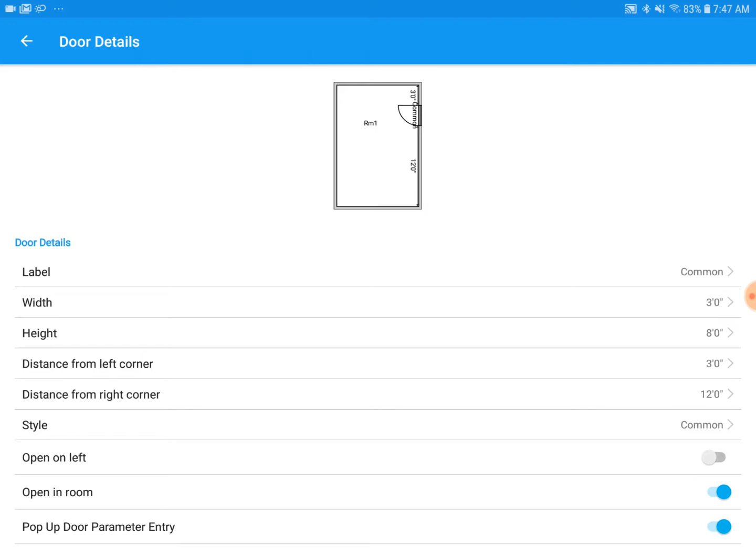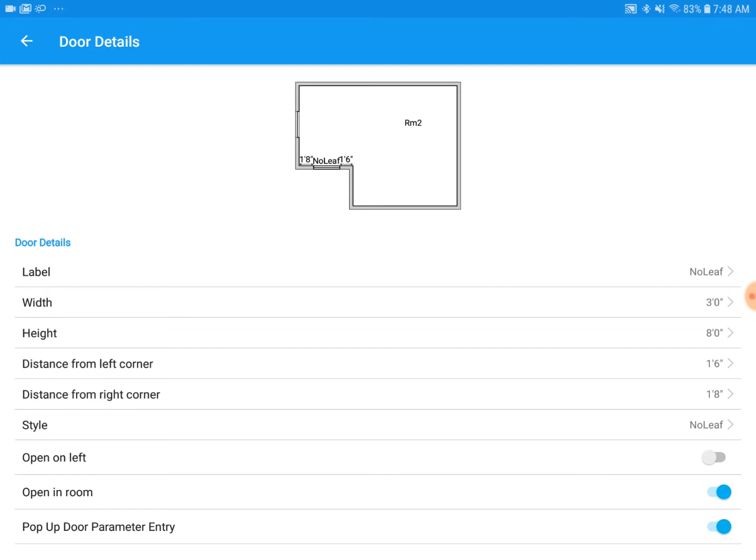I'm going to grab a no-leaf door so we can see the difference, and drag this into a different location. Same idea, I can edit these details if I choose to. The types of doors we use are for aesthetic purposes only; the type will not make a difference with our estimation.

If I move over to the room section, we have some templates saved here that are automatically in your database, but you can also save your own to these locations. Same idea, drag and drop onto the screen, and as I let go, it'll be put in place.

If I go to cutout, these are great if you need to remove area from the net of a room, such as for a cabinet, a tub, or a sink. Again, we have some pre-populated, but you can always save your own. I can just drag and drop one of these into the room, and we'll even have markers to snap it into corners. Same idea with that pop-up, we can always turn this off or edit some of the details.

We go into stairs, rinse and repeat. Grab a stair, drag it over, and once I let go, we'll have some details we can edit for the stairs, such as riser and tread, number of steps, the width of the stairs themselves, and even the covering style.

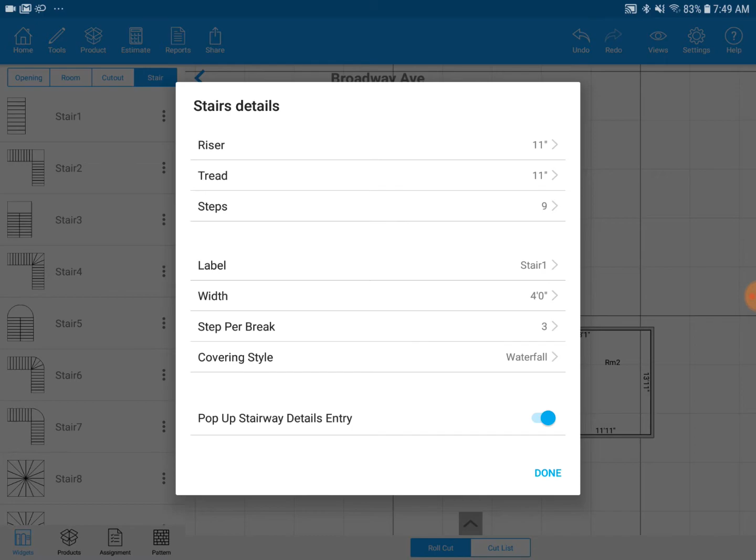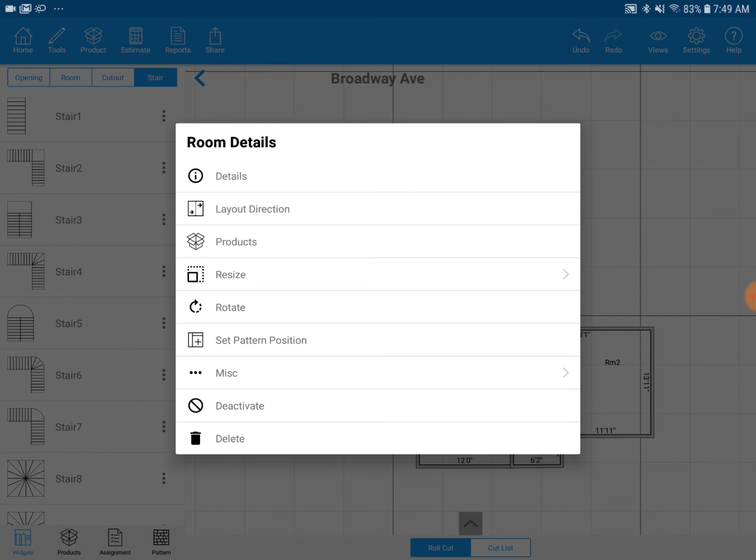Now if we want to save any of these as templates of our own after we've customized them, simply tap on the object, tap on the i icon, scroll down to miscellaneous, and you'll see the option to save as template. Then you can easily drag and drop this in the future, even on a different project.